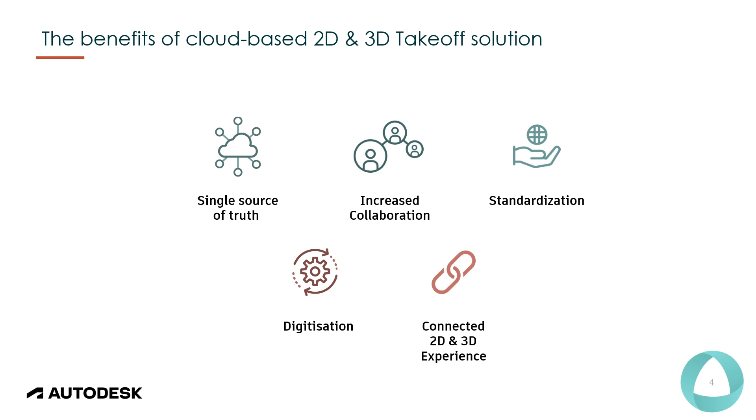So before we head into the product demo, let's look at some of the benefits that come from implementing a cloud-based 2D and 3D takeoff approach.

By adopting a combined 2D and 3D experience, you can leverage a single source of truth for all your project members to collaborate from. This will ensure that all team members are looking at the most up-to-date information to build their estimates.

Being cloud-based also will increase collaboration across teams in order to reduce any potential for duplication of effort and create a much more seamless experience during estimating reviews.

To continue to enhance collaboration, all your teams should be working through comparable processes during takeoffs, being able to standardize on one tool so all estimators are using the same classification systems, and Autodesk Takeoff will enable this.

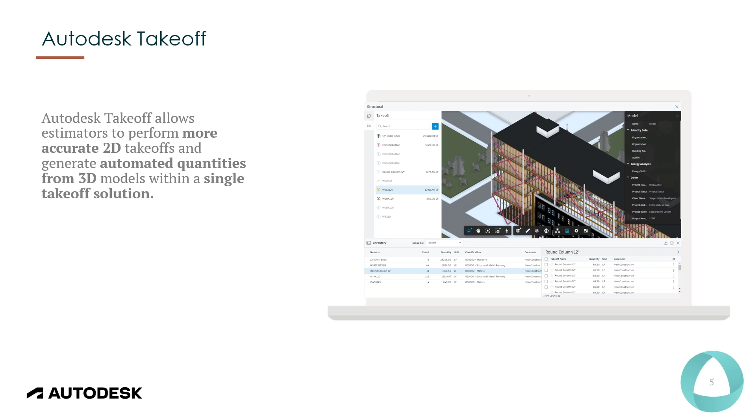And then lastly, a connected 2D and 3D experience will also allow all estimators to take off more efficiently and accurately.

So that brings us to Autodesk Takeoff, which is a cloud-based 2D and 3D quantification solution that helps you work collaboratively to generate more accurate quantities faster.

Autodesk Takeoff is part of the Autodesk Construction Cloud and also leverages Autodesk Docs as its backbone for document control. This is the same document management leveraged by Autodesk BIM Collaborate and Build, which gives you a single source of truth.

It also enables teams to stay connected from design right through to construction in a single environment. So enough about that. Let's head into the product demo for Autodesk Takeoff.

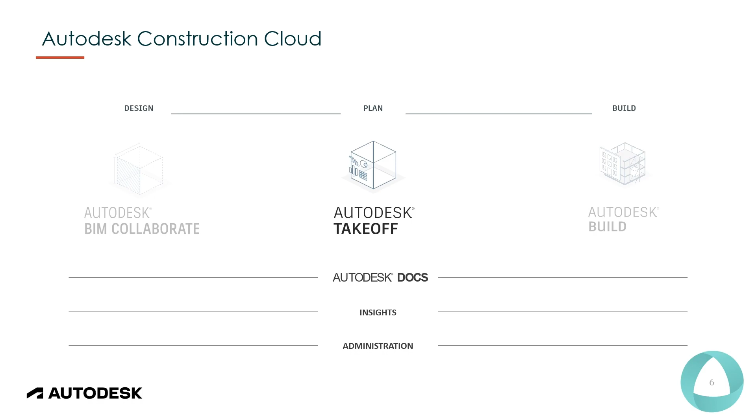Here we have our project open on ACC, and we will start with packages, here on the sidebar, and then go to settings. First we will choose the appropriate measurement system for our project.

Next we will choose a classification system. The drop-down will give you two options. We can use the sample assembly classification if this happens to be a test project, but in a real project it will require us to upload a custom classification system.

The classification information is usually stored in estimating and cost systems and will need to be replicated within Autodesk Takeoff. So we will select Upload System Classification.

Once we open it, we will see the instructions at the top. Do not delete these instructions before re-uploading this template. Once you have completed the Excel spreadsheet, you can save it and upload it by selecting the Import Custom System.

If you are using two different classification systems, you can choose a second system here.

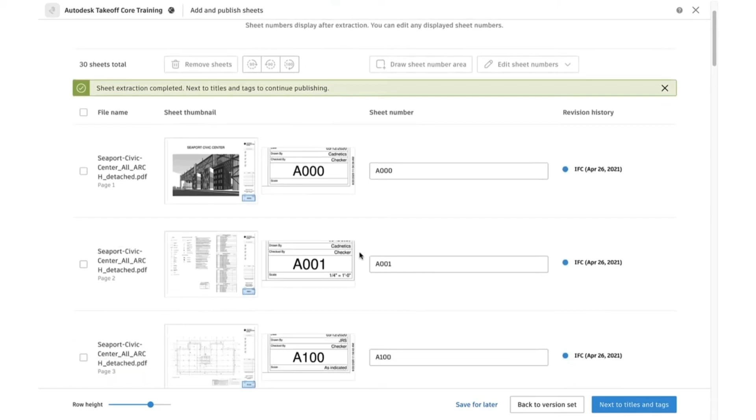Go to Sheet Numbers. You can scroll through the list to review the sheet numbers. You can see the file name, the sheet thumbnail, sheet number, and the revision history. You can also easily compare the title block of the sheet with the extracted sheet number for accuracy, and if any sheet numbers were not extracted properly, you are able to edit them.

If there are only a handful of sheet numbers to edit, you can just click in the field and change it one by one. If there are a lot more sheets to edit, select them on the left. Notice when you select sheets, these options at the top become available. So you have all your sheets selected. There are 2 ways to edit them: the first is to draw a sheet number area, and the second is to edit sheet numbers with 3 selections.

Once you are done reviewing your sheets, you will click Next to Titles and Tags. Now we will see the extracted sheet numbers, thumbnail, titles, and tags.

Similar to sheet numbers, sheet titles are extracted automatically but not extracted from the sheet title block by default. Rather, they're extracted from the index sheet if it has been uploaded. If there is no index sheet, or for any reason the sheet titles were not extracted properly, you can always edit them. Similar to the sheet number, you can change them by selecting the field or by selecting the sheets and using the 2 options at the top.

In the last column are the tags. Tags group the sheets and allow you to find them quickly. The tags are automatically added according to discipline, but you are able to add custom ones. Then when we are done, we can click on Publish Sheets.

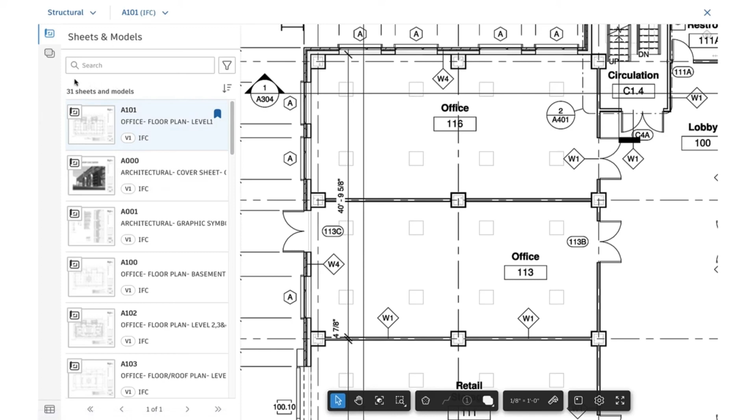So to start creating your takeoffs, we will select the takeoff type to use. We will select the structural columns here and then select the individual columns on the sheet. As you select the columns, the quantities will start populating next to the takeoff type as you go.

So let's create another takeoff type. This type we will create a linear measurement. You will draw a line across the distance you want to be measured.

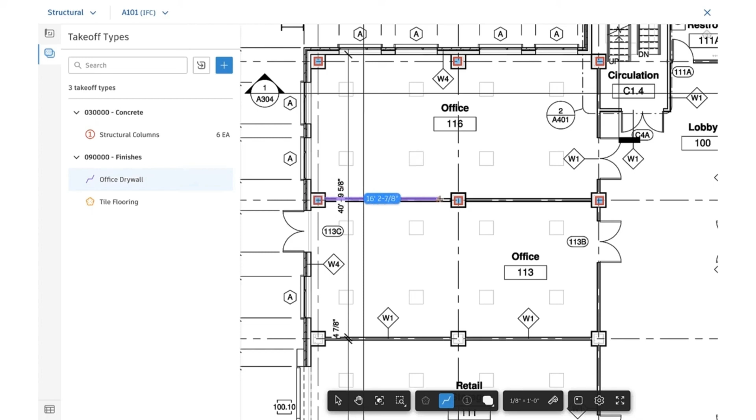You can also create a polyline and click on each point you want to measure, and then double click or press enter on the last selection point to end the measurement.

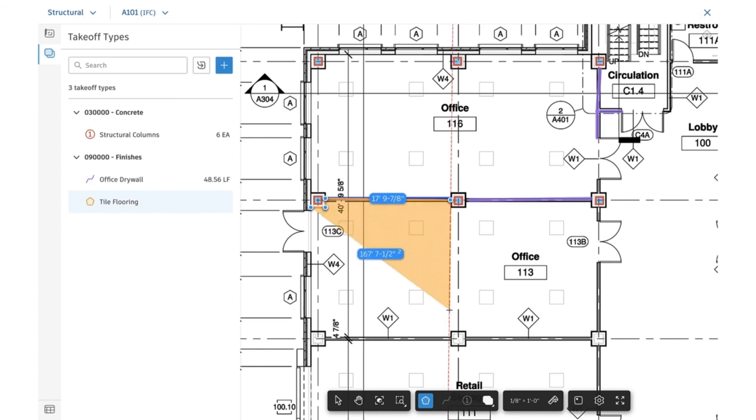So now we will create an area takeoff. You will click different points to create your area shape and then double click or press enter to close the shape. If you have areas you would like to combine,

you can select them and then click the combine and cutout tool and then combine the areas.

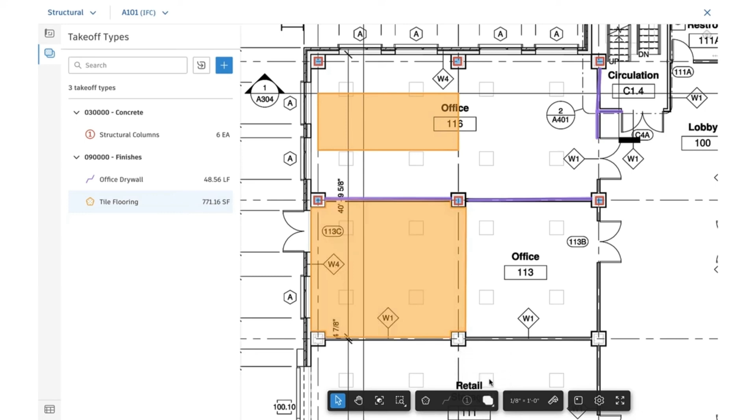So you can then continue to create your takeoffs on the rest of your sheets.

Right, so now to create a takeoff on a 3D model. We'll select the filter icon and select 3D models. To begin our 3D takeoff, we will select an object in the model.

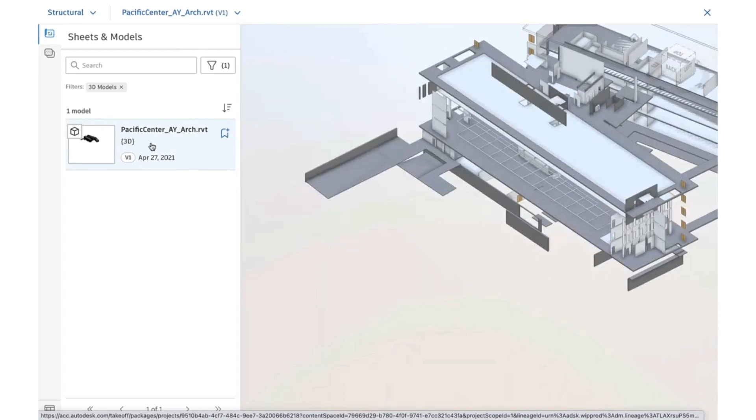And then we'll click on the plus button to create a new takeoff type. The name generates from the type name in the Revit model, but you can change it. We'll also select the classification and output, and also create model mappings.

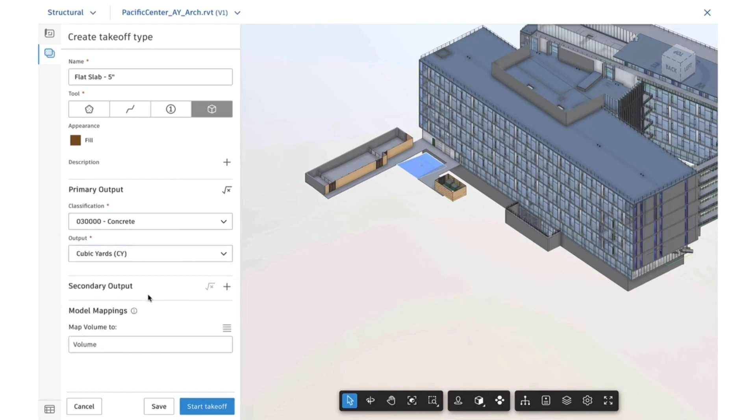To add more objects to the takeoff type, we will select the object in the model, right click on it and select all flat slab 5-inch, and it will select all objects with that property. Then click the check mark to add the objects to the takeoff.

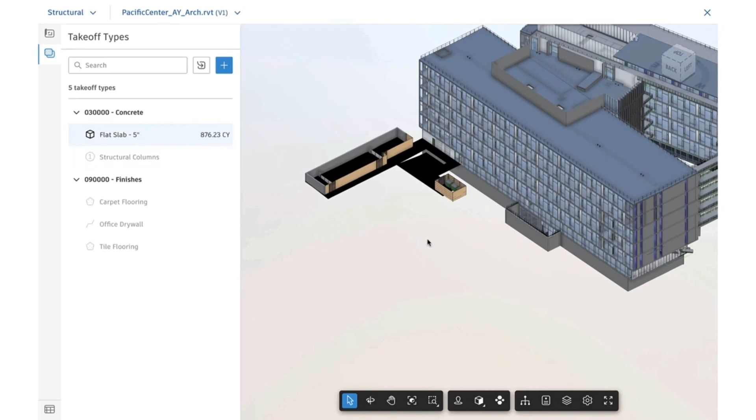If we want to make sure we have taken off all the items in this 3D building, we can use the Form Cluster tool, which breaks down the building into all the different categories from Revit. And then if you've missed anything, you can go and select them and add them to the necessary type.

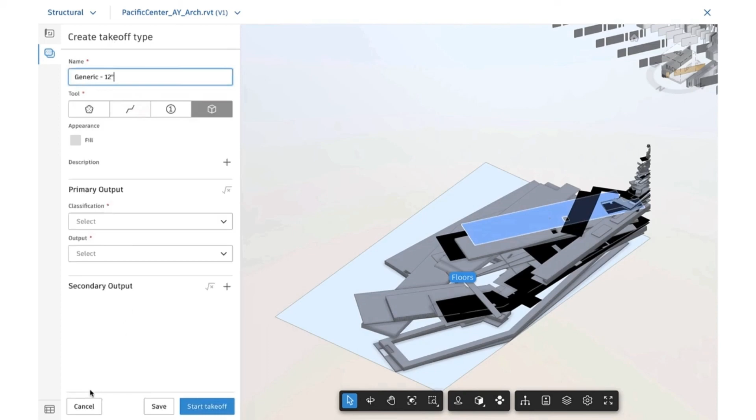So to see a cumulative view of all the takeoff items across all sheets and models, we will open the inventory by selecting the inventory icon. It will open a panel and display all the objects you have selected. You can also move this panel to a different screen for better visibility.

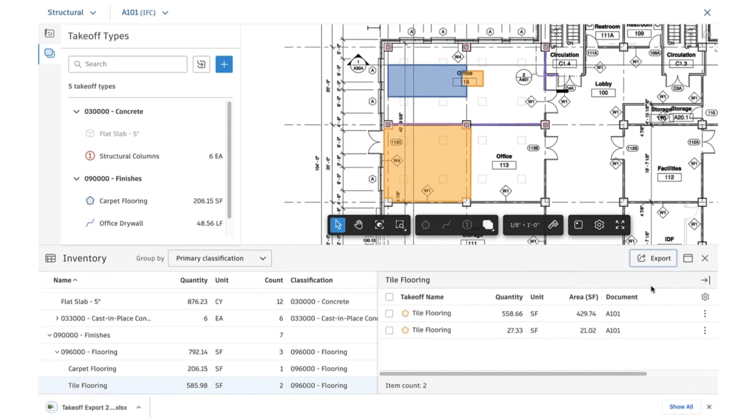So once the takeoff package is completed, we can export the inventory data. This will export to an Excel file that will be organized by the current inventory grouping. You can click on the export button and it will auto download the Excel file.

To export the inventory data for all packages, you will go to the Packages tab and click Export All, and you can then choose how you want to organize the inventory data and click Export, and an Excel file will be automatically downloaded containing all the takeoff inventory data across all packages.